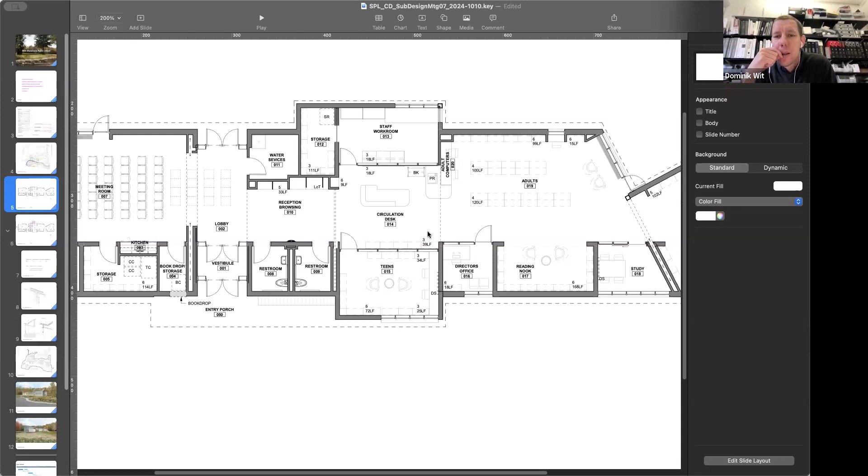So how much is the savings to do this? That is the caveat, because we were discussing this as a savings, and yes, you would see savings. So what I included here, it's a little bit too zoomed in. For the tile, we're looking at $47 per square foot. Retroplating is $15 per square foot. But if we go with resilient, it's $9 per square foot. So if cost is the guiding kind of decision here, resilient flooring makes sense.

The benefit of resilient flooring is you can really control your finish, right? You don't see cracks if people don't like that. It's cheaper, it mutes foot traffic, right? It's a little more comfortable. The resilient flooring has this minor, very subtle give under foot traffic. So it's a little bit quieter, it's a bit more comfortable.

So yeah, when you say resilient, are we talking sheet goods or are we talking 12 by 12 tiles? Sheet. Okay, yeah.

Yes, Andrea, I just have a quick question about maintenance. Which is easier to clean and maintain over time? Maintenance, there is no maintenance requirements, you do not need to reseal, as I understand it. I'm not sure on the periods, if there is like a 20-year or what the long term is. I think it would be similar for both as far as cleaning is concerned. Resealing the concrete, I don't think, as I understand it, that there is a need there. I will confirm that for you. So the resilient, as I understand it, is you live out the warranty period for the product and there's no maintenance. It's purely cleaning, and it's highly resistant to cleaning products, both the same.

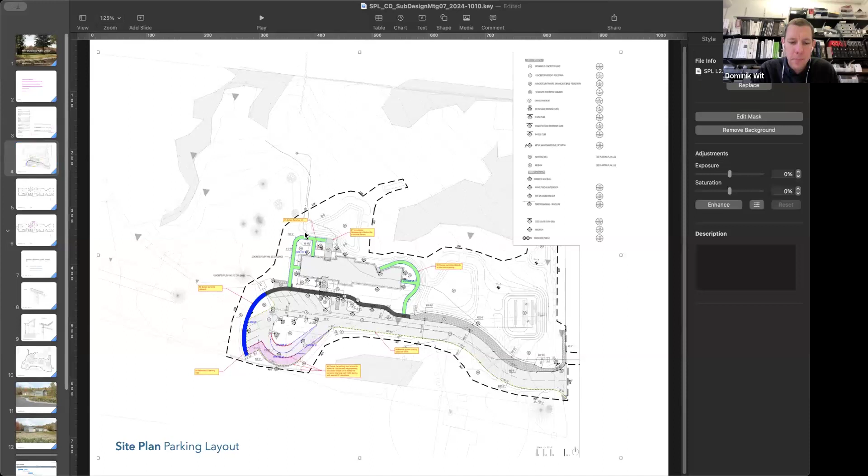Moving on to the next slide, I wanted to bring this plan up because I don't think we discussed these elements - we didn't really get a sense of what we are trying to do by deleting this parking stall. So the intent here, and we have our landscape architect working through this revision, the dotted lines you can see would be the revisions to the extent of the asphalt. We would delete this stall, all this asphalt would go, and we would increase some of the asphalt here, but still be able to incorporate this turn.

The other elements highlighted here were VE items - we were talking about bituminous curb instead of granite curbing, going to bituminous footpaths shown in green, deleting this concrete path completely shown in blue, and deleting the three benches we currently have. We will investigate what the alternatives are to the precast concrete pavers at these two locations.

So Dominik, can you give me the dimensions of those two areas? Because our Friends of the Library group is exploring one of those for brick fundraising options. I told them I would get the dimensions of the front walkway and the back walkway too, so they would need to know how many bricks would be needed. But it seems like that front walkway would be a great location for that.

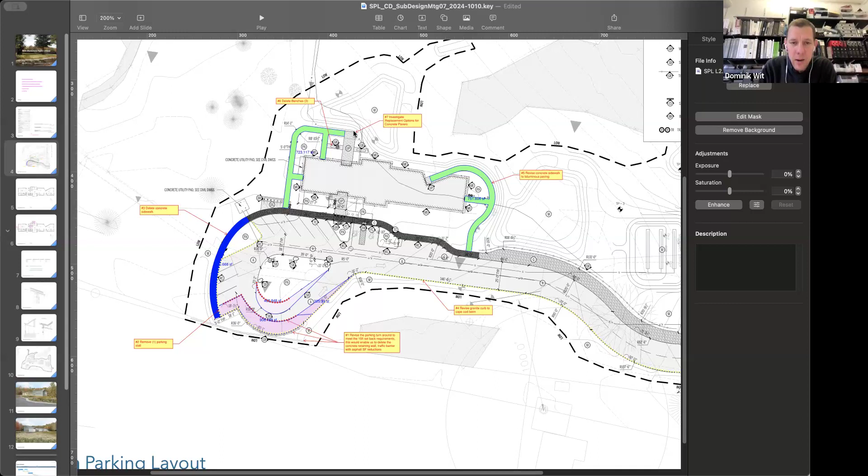High visibility, yeah, absolutely. So I'll get that to you. Nothing new here really - I just wanted to present this, and this is not the final layout. I just wanted to give a diagram to our talking points from the last meeting.

And then I had the FF&E plan in here that we submitted as part of the design development pricing set. I didn't really have anything to add here other than to say there are some additional things we are working on specifically to hopefully reduce cost. So we think there's some room in the staff workroom storage closet - we've kind of spec'd that the way we usually do.

Adjustable shelving, it's laminate veneer. Finishes on that, I think we could go low spec here to be more utilitarian. It may be an off-the-shelf product, Marianne, to really allow flexibility, but not make it a millwork piece potentially.

Similarly for Library of Things, we've discussed it at a high level, but we've got to get into the details. That's something we're really focusing on as well. We think we can do this to save some money. This element on its own was around $25,000, so we think we can realize some savings there.

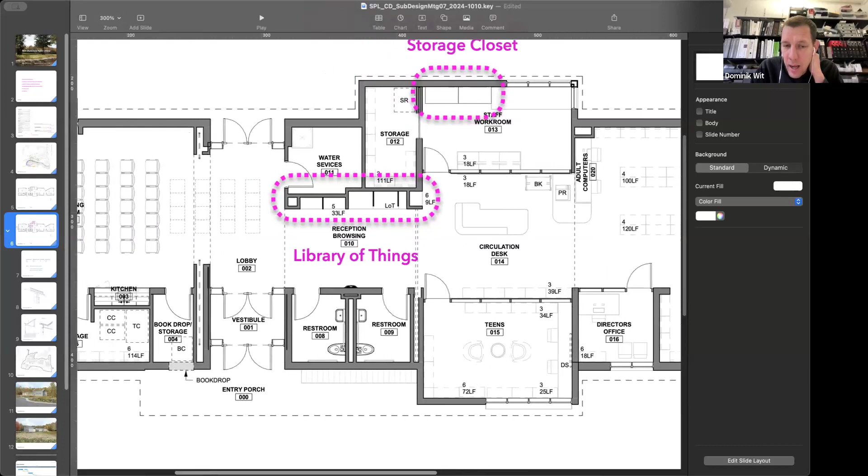While I'm on this slide, we recently heard, as of this morning, from our code consultant that the plumbing code has been revised, requiring that we basically double fixtures for the occupancy of our building. This affects all our projects in our office. It was instituted at the beginning of this year, and we've been blindsided by this—this is in Massachusetts only. Usually when there's a code change, there's a grace period, and what's highly unusual about this scenario is that it's been sprung on us effectively.

So we think there's good reason to go to the plumbing inspector and ask for a variance here, not only because of the way it was implemented, but also because of the need in our project to keep the square footage down to make this project viable.

We've discussed this and are in communication with our code consultant. I still need to hear back from our plumbing engineer—we need to get their position. This has affected all our projects. We have other projects that are right at the end of CDs, and you can imagine nothing about this is fair for a project about to go to permitting, and suddenly you need to double your fixture count as a requirement to meet that code.

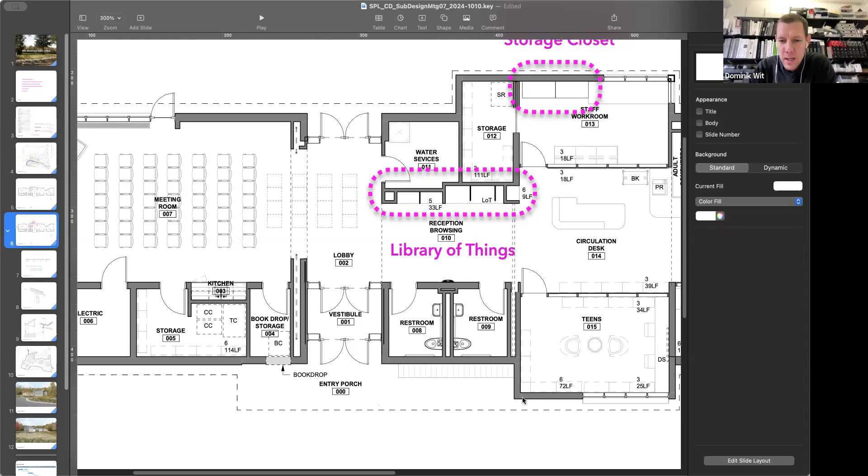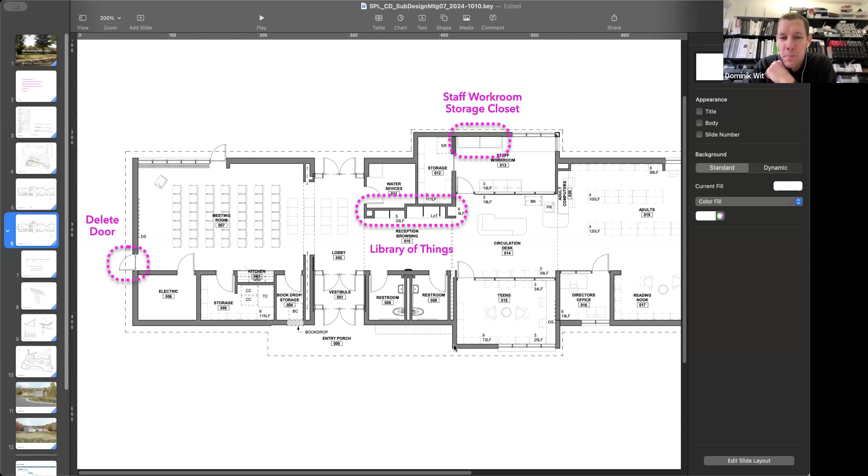So we think the best avenue here is to appeal it, and we think there's good grounds for that. Matt and I have discussed that if we really had to meet that requirement, jeopardizing the entry to the building, we think there's potential to grow these restrooms here, and it's something we'd have to do. Initially we were thinking, is there a way to keep this entry experience and canopy and finagle it with a reduction of other programs—could it work? But given how everything is fine-tuned with after-hours access and oversight into teens, we feel like if we had to, can we make it work by growing the volume here at the entry? It really diminishes our entry experience, but if it has to work, it has to work.

What we could do there is allow for it, because the roof footprint is really what's dictating the fire suppression code requirement. That's our avenue if all things require us to do that.

So then they would have stalls—yep, we would have to. That's right, so it would be two stalls. We're still getting to the bottom of the requirement.

Again, I got an email this morning about it, so I don't know, Roger, if you've heard wind of this on other projects that are in design. I haven't, I'll look it up—was kind of researching the updates on the building code, which just seemed to be starting that process. Yeah, and that would have a concurrency period once they do, so that shouldn't be an issue, but I'll find out about this plumbing one too. Okay, I'll send you all the information I have, Roger, just for your office.

It's new news and a lot of scrambling on our end, so we'll keep you updated. I wanted to let you know because we just found out today, so we'll keep you in the loop as things develop. We don't think this is—we're not fearing the worst at this point. It's early days, and we think we have great reason to fight this as it stands for this project.

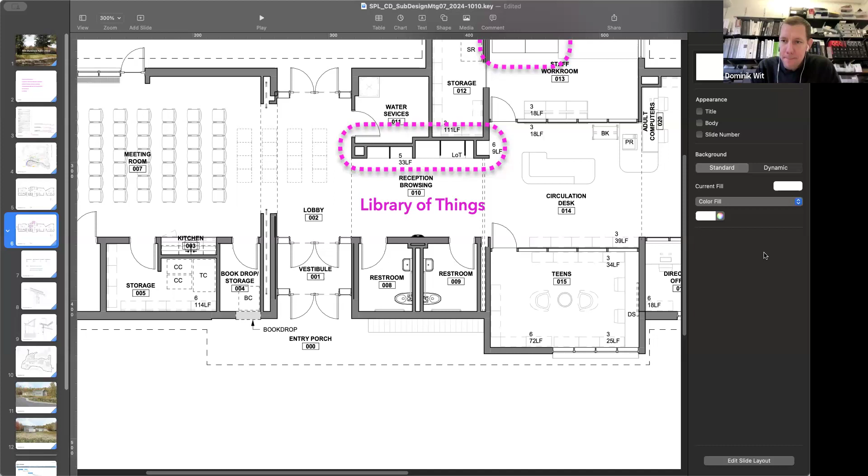That was really it for this plan. Again, as we go through CDs, Marianne, we're really going to get into the fine grain of programming each space, making sure we meet your needs as far as storage, office spaces, collections, seating, all the electrical devices, floor boxes, all that kind of thing. We're really going to get into the detail elements here and the fine grain detailing on the interior of the building. We have it in a very good place, but there are a few things we'll review with you as we work through them.

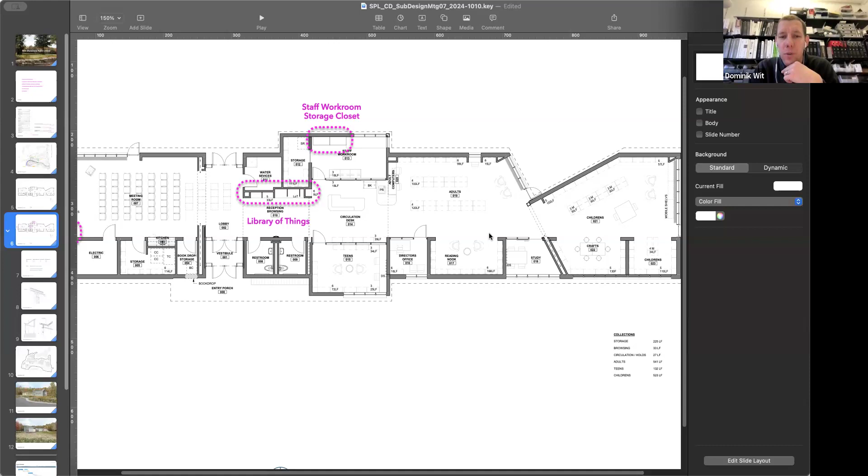Can I ask a question on those sliding doors? What material are those going to be? Are they going to be wood, glass, or metal frame? Metal framed, aluminum. And then, since they're pocketed in a wall, how do you fix them if they jump the track? I believe there is a floor track too.

I'm trying to remember the details for them. We are going with a product, I'm blanking on the name, I can get you the details. We're using a system for basis of design. We did this at the very beginning of DD, so it's not fresh in my mind right now. It's on the tip of my tongue. Something to look into. Acoustic performance is another thing we're looking at. Structural engineers already accounted for support for those systems. But yes, there'll be an aluminum system, glazed, so you can see through them.

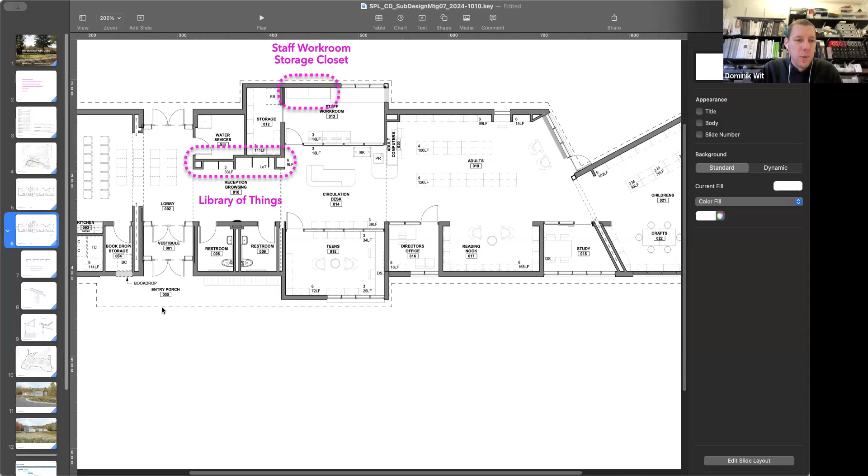Moving on to the roof insulation. We received an evaluation comparing 5-inch versus 7-inch roof insulation and the building energy requirement associated with that. You would figure that by increasing the roof insulation from 5 to 7 inches, an additional 2 inches, you'd see some cost savings in the need to heat and cool the building. Funnily enough, there's diminishing returns here.

This is related to our add alternate to increase the roof insulation. There is negligible cost savings by doing that switch, this is per annum. Looking at the add cost to the project of $18,000 and change, we feel it does not warrant increasing the roof insulation. We currently meet our demand with PV, so we feel it's a pretty simple, good evaluation to make. The energy model was used to get these numbers, and we feel we should just hold the 5-inch roof insulation and realize those savings.

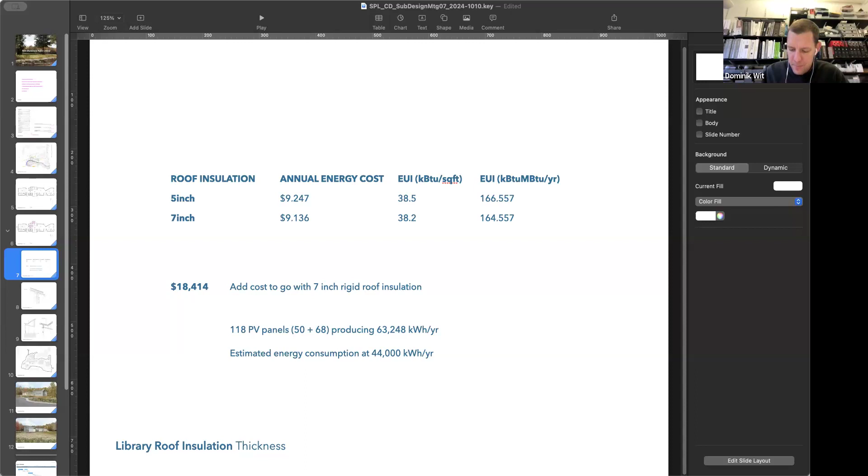Yeah, so let me ask the engineer about that, Andrea, and our requirement to meet that and what that means for rebates.

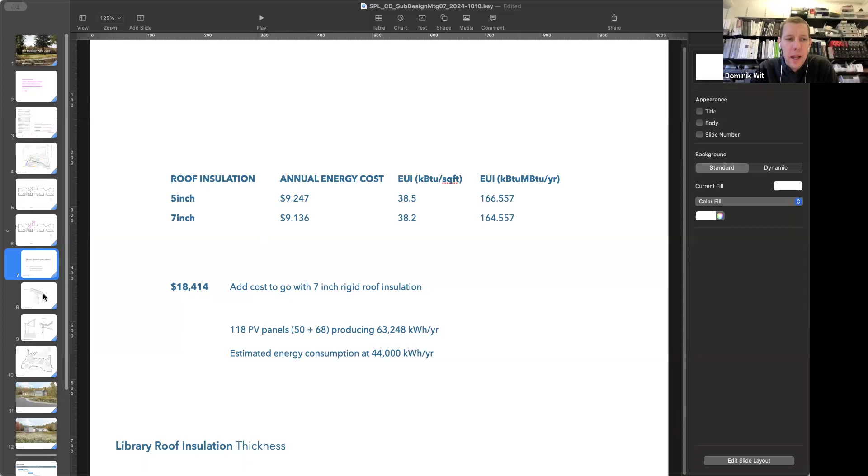So I wanted to present that as we moved into detailing. We had drawn our roof insulation at 7 inches to make sure we accounted for detailing considerations around the roof. With that in mind, given we are not seeing big energy savings, we've reconsidered the roof and redrawn it at 5 inches, again in the spirit of looking to save some money in how we detail every element of the building.

Stephen, I think you had raised the question about simplifying this roof eave condition - basically flattening the roof, extending it closer to the roof eave, simplifying the detailing here. We ran this past our cost estimator, and he feels you'd see minor savings of $2,000 to $3,000 for the whole roof. So it's really not a big savings, and that's kind of back-of-the-napkin because there's a lot involved. But again, it's either no savings at all...

...because you are continuing this rigid insulation further - you're buying a little bit more material, but you're simplifying the detail here. You would delete the flat seam roof, and this would just be a flashing detail. So there are many components here - you're extending the standing seam roof somewhat. So in the mind of our cost estimator, it's really a no-cost benefit.

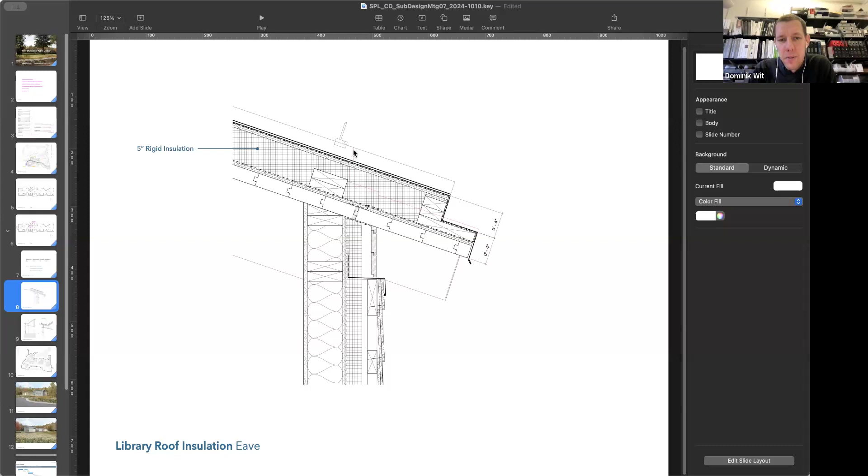But we feel this detail simplifies things a little bit, and we think it's a better way to go, especially as I bring up the next drawing regarding the upturned roof and ensuring the teens room has sufficient roof insulation. So the red line is the profile previously seen, and this simplifies things.

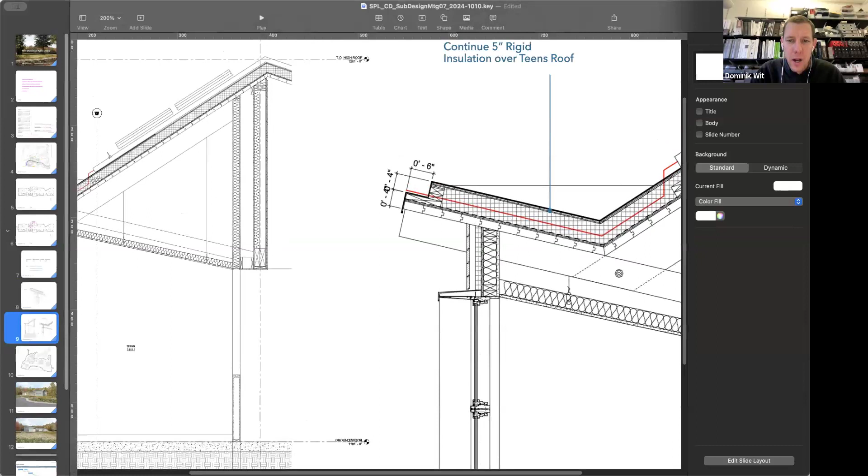So you can see here the section through teens - this is on the east side of the building. The red line is a kind of blow-up of that; let me zoom in a little more. The red line shows the previous profile.

The intent was that we had metal roof for the upper roof and a TPO roof for this upturned roof condition, incorporating a cricketing so the roof could drain north and south. By considering this 5-inch roof insulation thickened condition, we would continue that down into the valley of the upturn and back up again to ensure we meet the requirements for this interior space and have sufficient roof insulation here. The cricketing will still work.

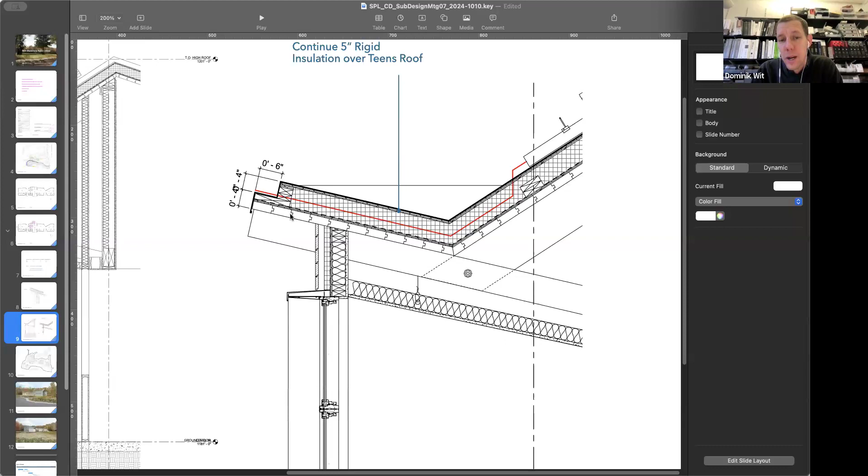We think it simplifies the transition here. We're still working through the detailing, but the transition of TPO under the metal standing seam roof would be simplified, and we then meet the roof insulation requirement for teens rooms. So we think we're simplifying things, we're meeting the requirement for teens, and heading in a better direction. We're continuing to develop this.

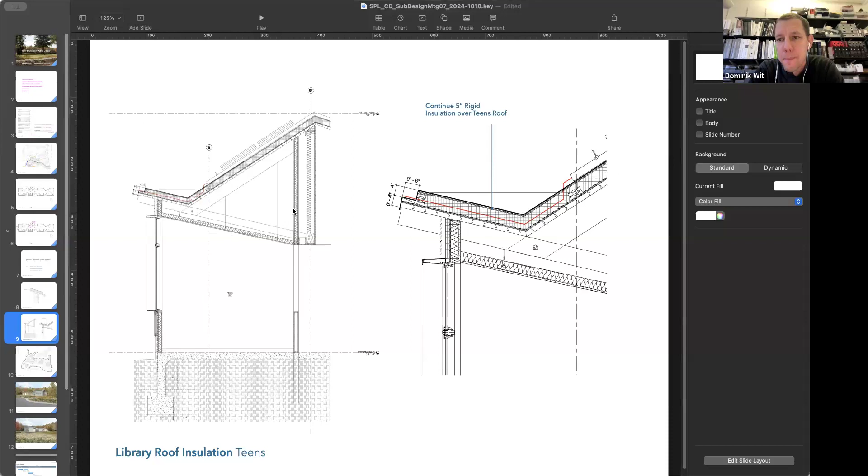The next step for us is to review this with Garland. They are working with us in a design-assist capacity on our roof, because they would ultimately warranty the roof as a complete system, both metal seam and TPO together.

Stephen asked: how do you deal with replacing the TPO if it's running up under the standing seam metal? You would have to, as I understand it, have some of that metal roof come up to replace the TPO completely. But as a warranty, both are considered covered under the same warranty - so if there's an issue with one product and you have to remove some of the metal seam roof, that's covered under warranty.

Okay, so if say 10 years down the line there's a problem with the TPO and it needs to be replaced, does this warranty mean we're protected and that's going to take place? That's correct. The other thing is TPO can be repaired as well.

Okay, all right. Then the second question is, so the insulation now is covering the teen room - but when you get to the other side of the cricket where it's over the entry upturned roof, is there insulation in there?

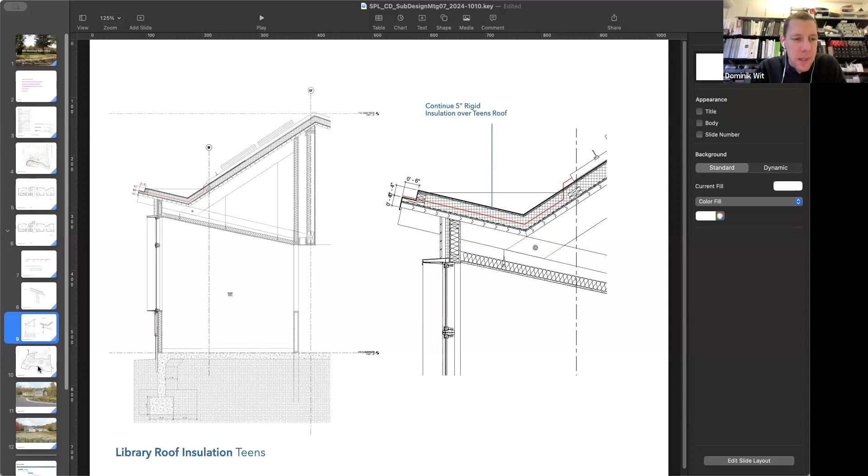So we're continuing that coordination. Moving on to the last item, I've got the schedule coming up, and I just wanted to share what we're looking to present for Conservation Commission. I'm going to be speaking to this plan, which was part of the NOI submission.

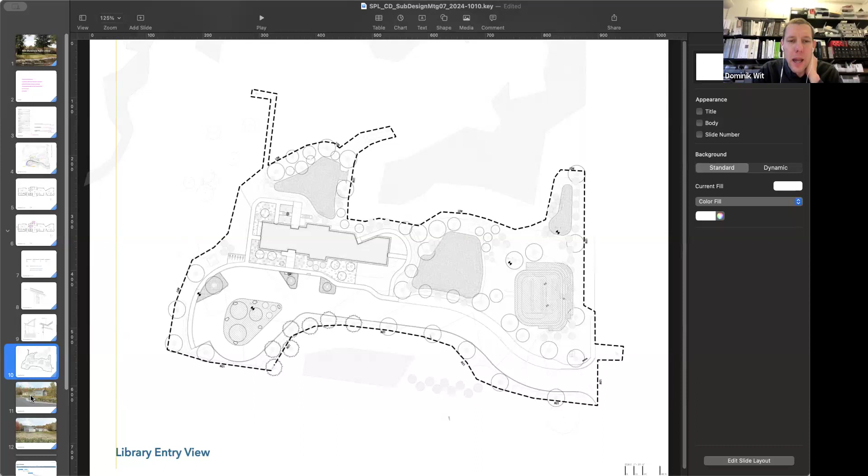Marianne, these were the renderings, the latest renderings we were looking to share. The caveat is that at the 11th hour before the NOI submission, there were some revisions made to the planting plan, which are not represented here.

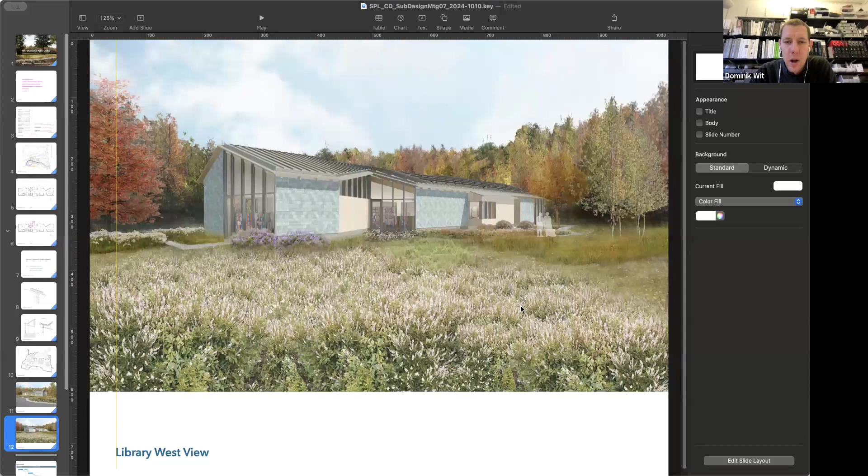I don't know if we have a lot of time to make wholesale revisions to these images, but I think it would be nice to at least give everyone attending the meeting a flavor of what this building will feel like. I'll contact Penny after this meeting and get her sense on the strategy for that.

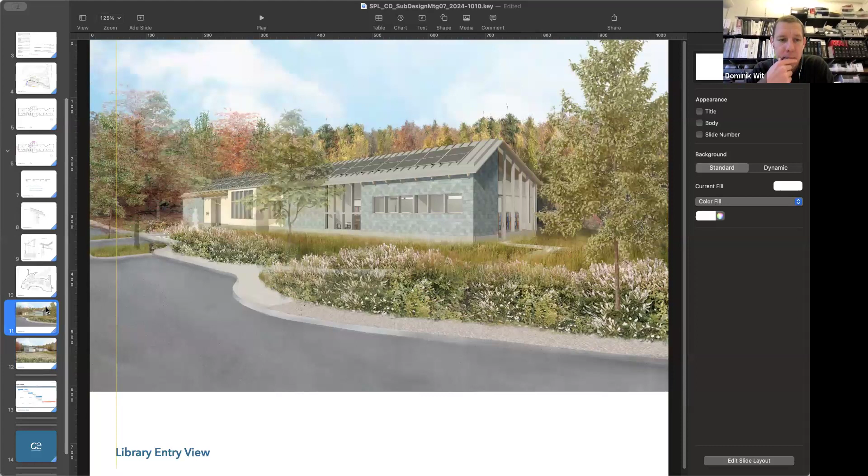We feel that estimating at 50%, I don't know if there'll be a lot of change compared to the DD cost estimate. We feel 75% is the best option at this point, with where we are now. This is what we're proposing, and then moving into 2 months of bid award, still holding construction to start mid-June.

At the 75% CD cost estimate, are we going to get a review set of specs? Yes, yep, I'll issue everything the way we did for DD. That's correct. Okay, thank you.

Yep, Andrea, I'll go back to my emails. I want to make sure you were attached to the DD submission that I sent to the town. Marianne, maybe you forwarded it to Andrea, and Heather, you need it now as well. I will go back and make sure you got the DD estimate. I'm not sure if you are reviewing it. I believe I did, yes. Okay, great.

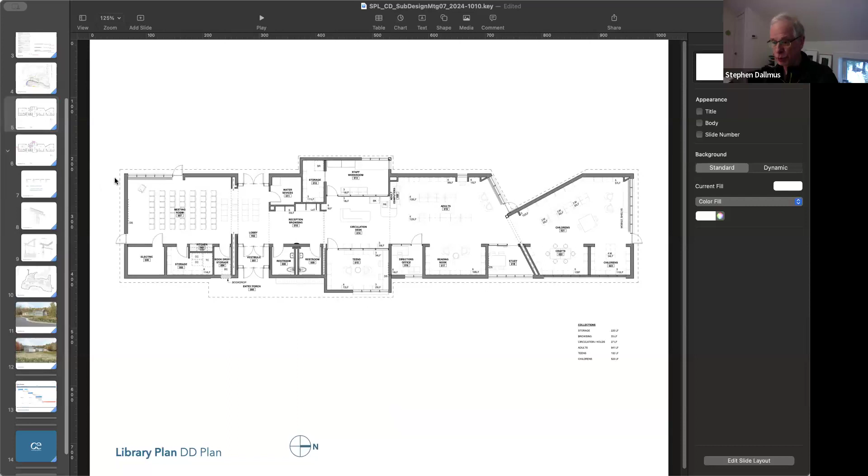You're muted, Dominik. There we go. Right back at you, Stephen.

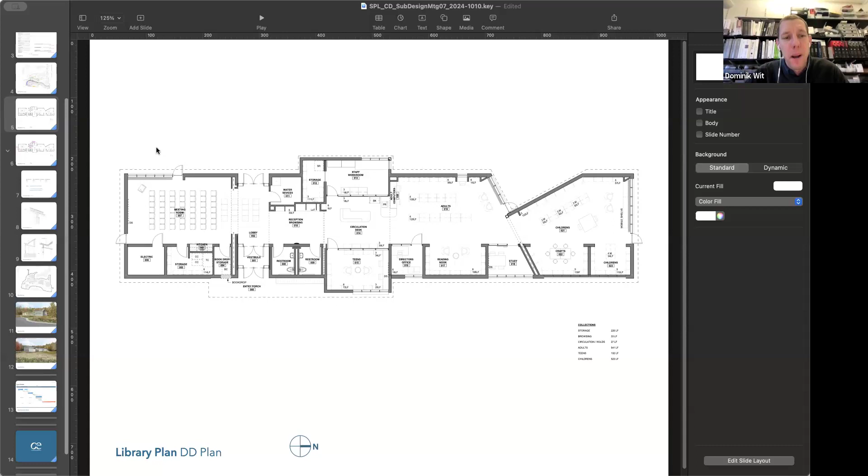So yes, we have discussed that, and again we need to be very budget conscious with the lighting system. But for the meeting room, we are considering that this wall has the potential to serve as a display wall. So we have wall grazing lighting in the ceiling for that. We have specific stage lighting, let's call it, specific to somebody conducting a meeting, specific to the front end of a meeting space. We were thinking about also using this other wall as a display, but I believe we are not anymore, since it's a bit interrupted by this door into the electrical room.

So I think there's at least 3 zones of lighting here, and you can modulate each of those. But again, potentially it's going to be operational from switches on the wall, or it's something we'll work through with you, Marianne. The intent is to keep it simple and not go with the most fancy system available. I'm not sure if at the lectern you could do some controlling. My sense is it's probably simplest to consider one of these walls as a switch point for the whole space.

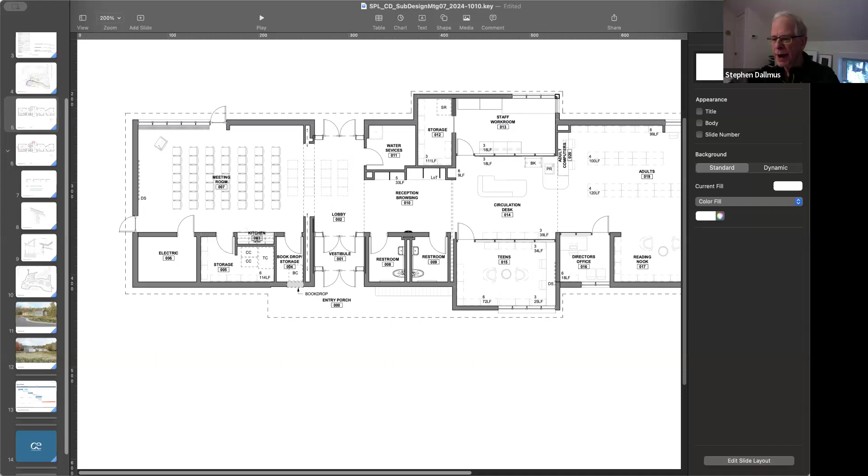Okay, well it's interesting. Again, looking at the reflected ceiling plan, it looks like there were representations of fixtures on the tracks, but only on, say, one track in each bay seemed to have fixtures. Yep, which makes sense with what you're saying. I agree, I think that's kind of an error in the drawing. Okay, I'll confirm that for you.

That was it, Marianne, if you didn't have anything else, at least from me.

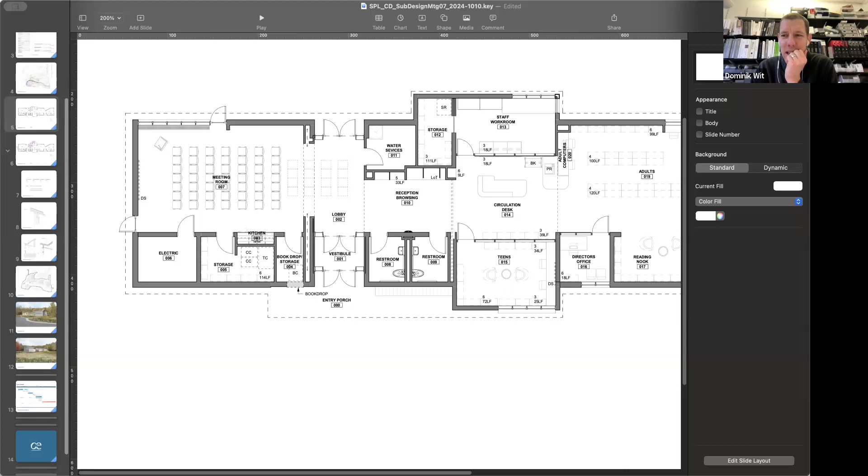You're on mute. When's our next meeting? Oh yeah, so you had set the committee meeting. Now I don't remember the date. I think the 23rd, yeah that's right. Twenty-third of this month. Right, so what about the next design development or the next design subcommittee meeting?

I figure we are doing a bi-weekly cadence, but that's for the committee meeting. Trying to remember what we did last time. During design development, we met, this small group met every other week for like 8 weeks. I think we do the same cadence.

And then we had a schedule where you had all of the different topics we were going to talk about at those meetings, and I used them to post the agenda. I can't see this to check if that's on here.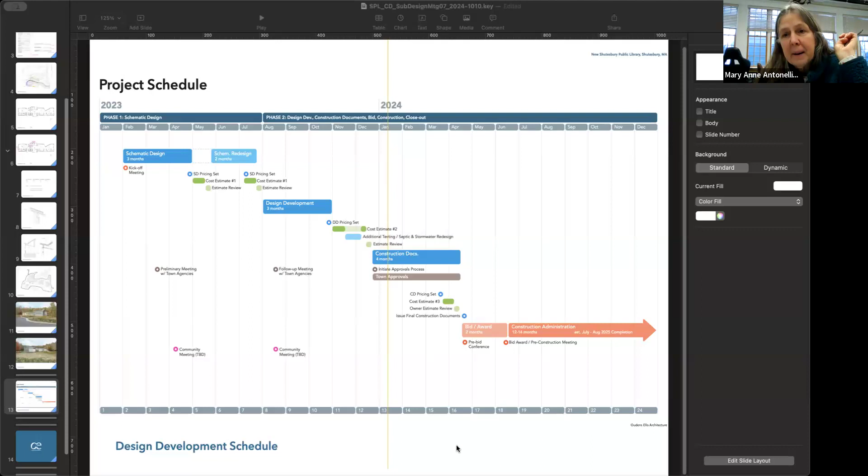And that we're gonna go over that sort of life cycle cost analysis, and any other VE and whatever else comes up. And we can share the concrete flooring.

Did you want to show us some images, or do you want to just email me some images? I can, if you guys are happy, you don't mind me jumping on our website real quick. I'd like to see the fly through, flooring images, if everybody else can bear with us. This won't take long.

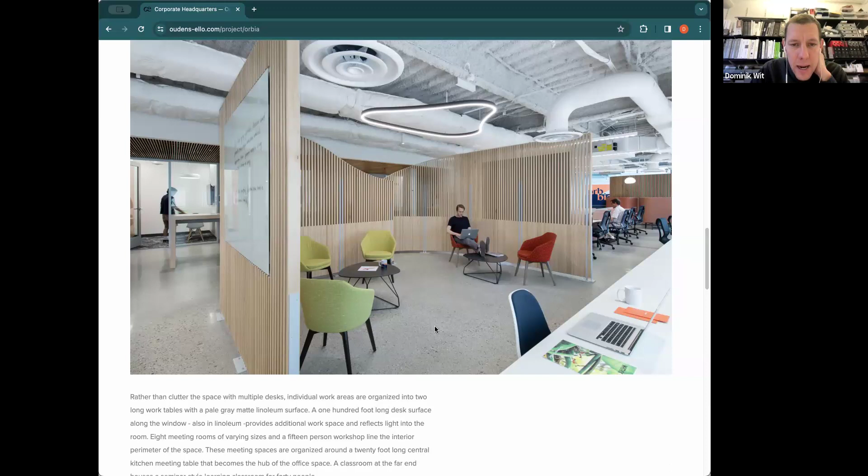I think there are some images of cracking - you can see here where my cursor is, there's a crack, this is a good 3-foot crack. You're not that close in the image, but again, aggregate is looking really nice here.

That crack I think I mentioned was over here, so this looks like a crack here as well. I'm sorry, no - this looks like some sort of surface expansion joint around the column. So this is Orbia.